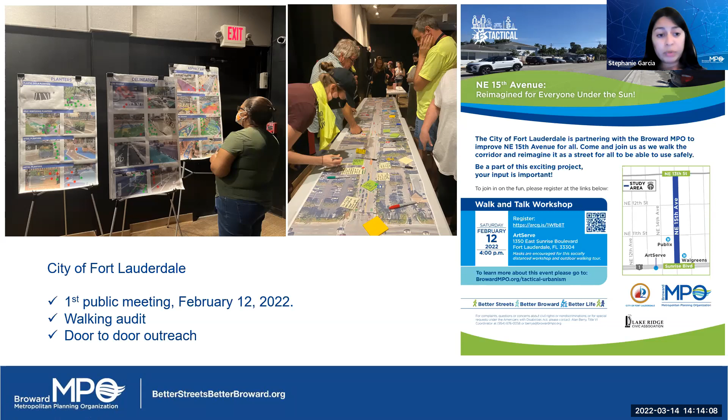At the ArtServe Gallery in the city of Fort Lauderdale. If we go to the next slide, there are also other opportunities, not only providing feedback but also volunteering. As we did in the city of Deerfield Beach, we have great volunteers from different organizations including AARP, and we'd like to extend this invitation again from the Tactical Urbanism Program, but this time in the city of Fort Lauderdale.

It's painting the streets, and we're also going to provide community service hours if you're interested, or if you have kids who would like to participate as well. This is a great opportunity to learn about what engineers and urban planners do in the field. So yes, this is an invitation for everyone. Thank you so much.

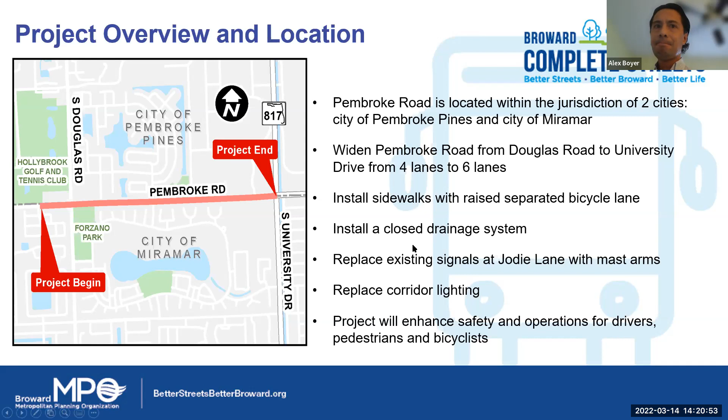Slide number 3. Let's get into the preferred typical section. This is alternative number 2. This typical section consists of a 22-foot wide median, 3 11-foot travel lanes with type F curb and gutter, a 3-foot wide utility strip or furnishing zone, and a 5-foot raised separated bicycle lane with a 6-foot concrete sidewalk adjacent to it. This is on both sides.

This typical section will require an 20-foot wide right-of-way acquisition to the north along the westbound direction, shown here on the left side, in order to meet the department's minimum design criteria. Next slide.

Slide number 4. Two other typical sections were also considered during the roadway typical section evaluation. So let me show you the other two typical sections. The first of these two alternative typical sections, alternative number 1, consists of a 22-foot wide median, 3 11-foot travel lanes, and a 7-foot on-street buffered bike lane, with 6-foot sidewalks on both sides. The right-of-way requirement for this alternative is 22 feet wide from the north side of the road. The major difference between this alternative and the preferred alternative is that the bike lanes are next to the travel lanes, and 2 more feet of extra right-of-way will be required. Next slide.

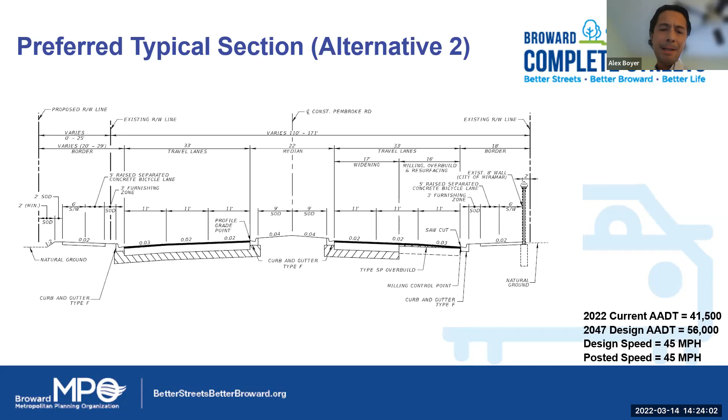Slides number 7 and 8 will show the project in plan view. The overall project length is about a mile long. North is up, and the road runs east-west.

The first segment of the project runs from Douglas Road to Jody Lane. The milling and resurfacing, shown in gray, starts west of Douglas Road, where existing bike lanes and sidewalks are present on both sides of the road and will be connecting to the proposed improvements. The pavement reconstruction, shown in black, starts east of Douglas Road.

The existing sidewalk runs throughout the project on both sides of Pembroke Road, but there is no existing bike lane in the westbound direction within this segment. The existing bike lane beyond Douglas Road going in the eastbound direction ends just east of Southwest 87th Way.

Another improvement in this area is related to access management. The area shown in green represents the proposed median. The existing full median opening at Southwest 87th Way will be changed to an eastbound directional median opening to increase traffic safety. At the Jody Lane intersection, as previously noted, the existing span wire signal will be replaced with mast arms.

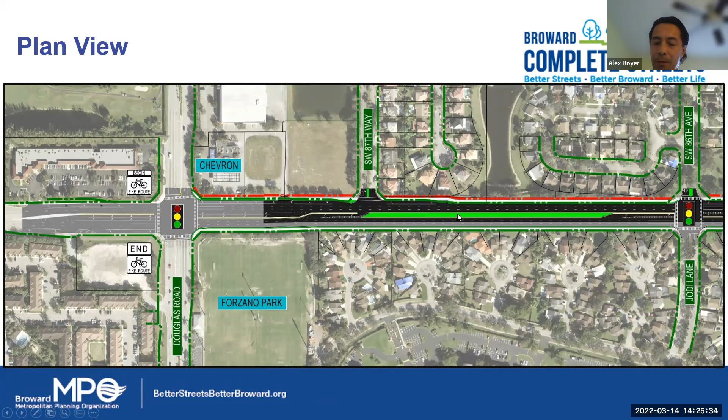Lastly, the line work in green is the existing right-of-way, and the line work in red is the proposed right-of-way to be acquired. Next slide, please.

Slide number 8. The second segment of the project runs from Jody Lane to University Drive. To remind you, the area in black is the pavement reconstruction, gray is the milling resurfacing, and green is the proposed median. The existing sidewalk runs on both sides and throughout the project as in the previous segment.

But the existing bike lane along the westbound direction ends just west of Poinciana Drive. The existing bike lane that ended just east of Southwest 87th Way along the eastbound direction, as shown in the previous segment, reappears just west of Poinciana Drive.

Existing sidewalks and bike lanes are present east of the University Drive intersection, which is the end of the project, providing connectivity to the Pembroke Road upgrades.

Access management improvements along this segment of Pembroke Road include modifications from full median openings to eastbound directional median openings at Poinciana Drive and at the abandoned parking lot where a future development will be constructed, as shown with the letters A and B on this slide.

The existing full median opening serving Walmart will also be improved by providing a longer westbound queue and by adjusting the median noses for safer in and out vehicle access.

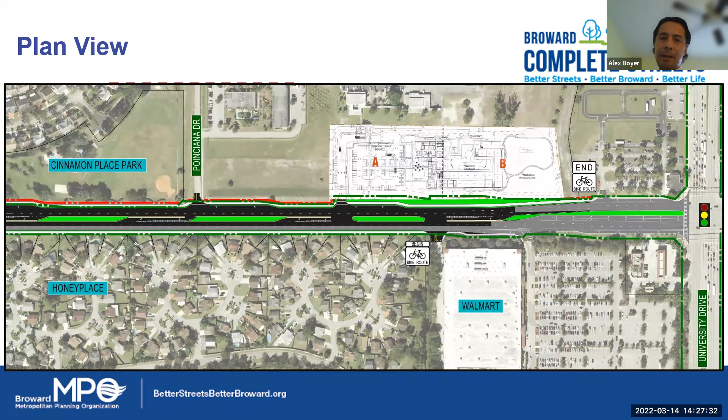Slide number 9, noise wall. No PD&E study was conducted for this project, so the FDOT will soon be conducting a noise wall study to evaluate cost, feasibility, and overall public benefit to construct a noise wall along the Honey Woods residential development between Southwest 87th Way and Jody Lane, to reduce the traffic noise that will be generated by the roadway widening and future traffic volumes.

The study will calculate future noise levels and compare them with existing noise levels to predict noise impacts. The goal is to achieve a noise reduction benefit of 5 decibels for 2 impacted receptors and 7 decibels for 1 impacted receptor.

To be clear, a receptor is a residential unit, and a decibel is a unit to measure sound levels. Urban noise wall heights range from 8 feet to 14 feet, and depending on how close these walls are located from the roadway or near the affected properties, they can effectively reduce noise levels.

An alternative location for the noise wall will be where the existing residential perimeter wall is, as shown by the blue line. The preferred wall location will be closer to the road, as shown by the orange line. Either wall location will affect the existing landscape, which will need to be coordinated with the local agencies for relocation.

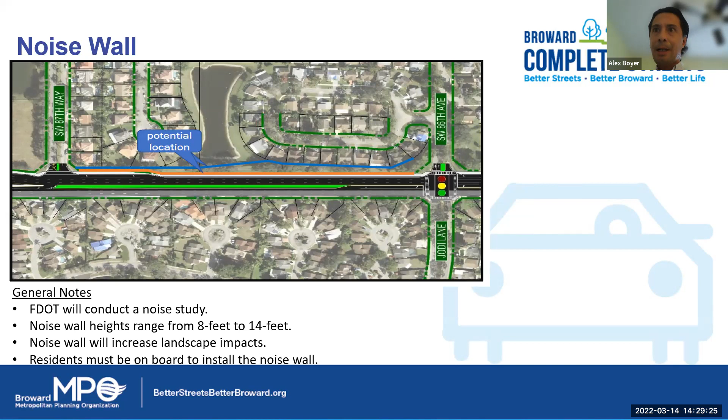Slide number 10, potential landscape impacts. This slide is just a visual representation of the existing trees that will remain adjacent to the pedestrian and bicycle facilities along the north side.

That being the case, not all existing trees will require relocation. There are many mature trees around this area that cannot be fully quantified until the design is further along and if the noise wall gets installed. Next slide, please.

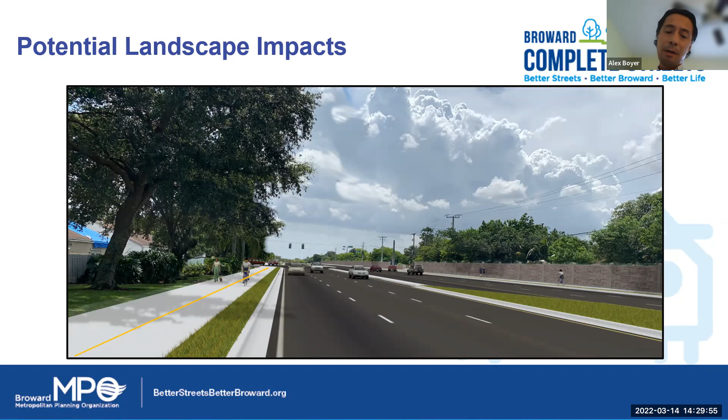Slide number 11, traffic analysis. Through our initial public outreach, there is a concern that vehicles traveling westbound along Pembroke Road will be backing up traffic in advance of the intersection at Douglas Road, since the project improvements will cause a merging condition just west of the intersection from 3 lanes back to 2 lanes, creating a so-called cut-through traffic situation through this residential neighborhood for vehicles trying to make it to Douglas Road and go north, as shown by the red dashed lines.

In order to address this concern, FDOT conducted a traffic analysis to evaluate congestion patterns and queue demands for the proposed intersection geometry. This analysis, along with proposed improvements to the existing intersection signal timings, found that during peak hours of operation, the queue in the through lanes will not block the right turn traffic from westbound Pembroke Road to northbound Douglas Road. Based on this evaluation, the cut-through traffic concern is not anticipated to develop. This topic will be presented and discussed in more detail with residents during our next public workshop.

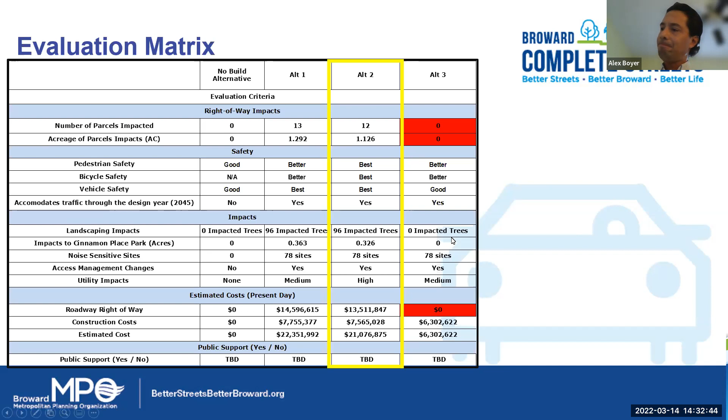Slide number 13, right-of-way impacts. The next 4 slides will go quickly, showing the expected right-of-way impacts for the project. We have identified at least 13 parcels that will require right-of-way acquisition based on the preferred typical section. The impacted areas are shown in pink shapes with yellow line work, representing the new right-of-way limits. These impacted properties range from existing businesses like the Citgo gas station.

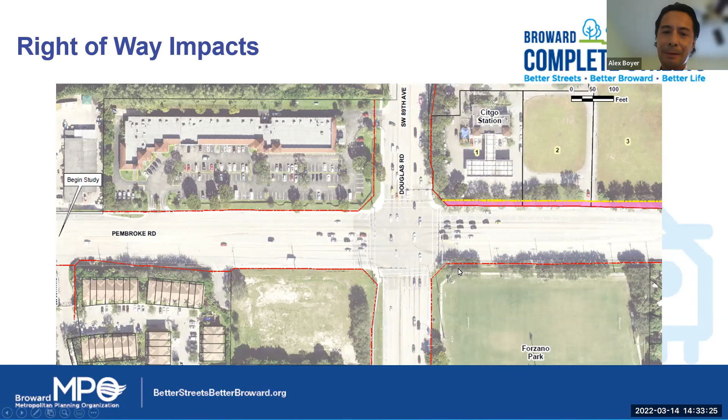Like these private properties owned by the Honey Woods Homeowners Association. And let me clarify that no residential property will be affected by the proposed right-of-way limits.

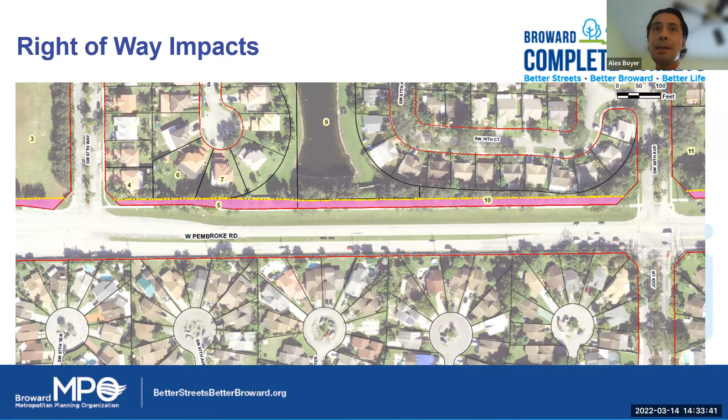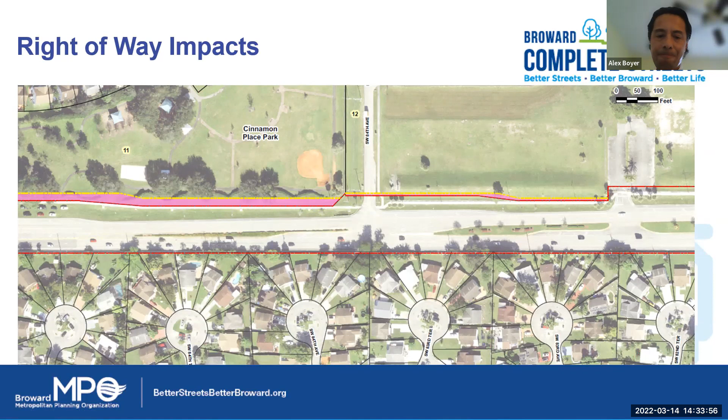Like public areas, like the Cinnamon Place Park owned by the City of Pembroke Pines. And let me say, no existing park activity will be impacted by the right-of-way acquisition.

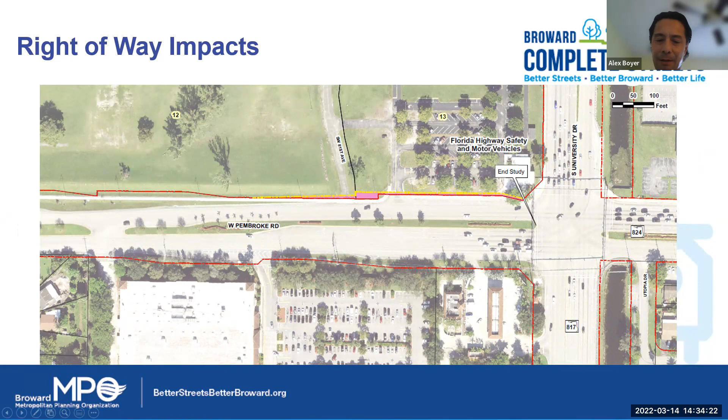Or like this little area owned by the Florida DMV. As of today, the design is 30% complete, and once the proposed plans reach approximately 60% completion, the right-of-way phase will kick in, including title searches, appraisals, acquisitions, etc., until we obtain final certification and the project is clear for construction.

Current project schedule and stakeholders. Our next public meeting is still to be determined. We have a production date for June 2025. There is no letting date since the construction is unfunded. The right-of-way is funded for fiscal year 2025, and the stakeholders are the City of Miramar, City of Pembroke Pines, Broward County, Broward MPO, and the Honey Woods Homeowners Association.

It's our last slide. We reached the end of the presentation. Here we have the FDOT contacts, Claudia Biniski Calvo, FDOT PM, and myself, Alex Boyer, FDOT PM assistant. Please feel free to call us or email us at any time. Finally, I want to thank you for this opportunity to present to you the Pembroke Road project.

Alex, thank you so much for your presentation. I'll turn it over to the CSAC members if they have any questions for Alex regarding anything he presented today. Alex, I don't think we have any questions.

So Ricardo, can I ask a question? Sure, absolutely, go ahead. Hey, this is Christine Banshee. Good to see you, and Alex, thanks for this project. I'm not a CSAC member, but I had a question looking at alternative 2 versus 3. It looked like 3 was half the cost and it saved all the trees. So I wanted to understand how 2 was weighted over 3, how the state decide between them.

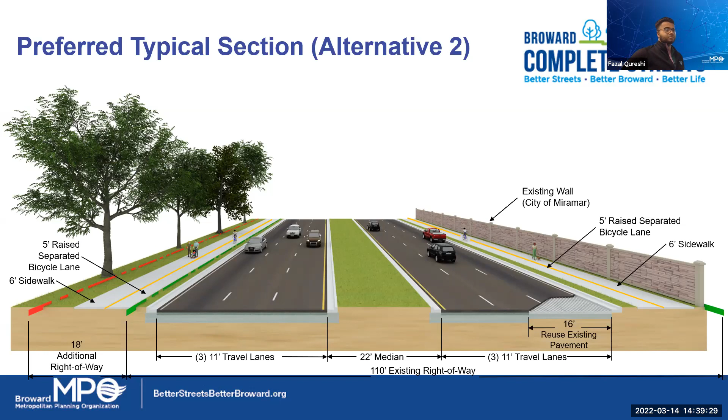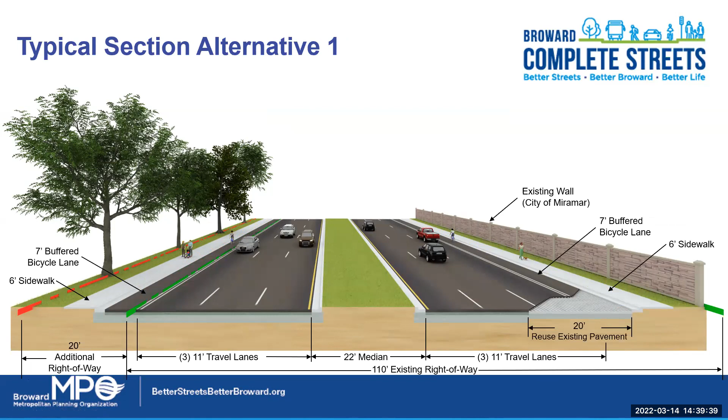Awesome, yeah, definitely. And at the MPO we love trees. We're tree huggers, so we definitely don't want to get rid of trees. Anything that we can do to save them, we will.

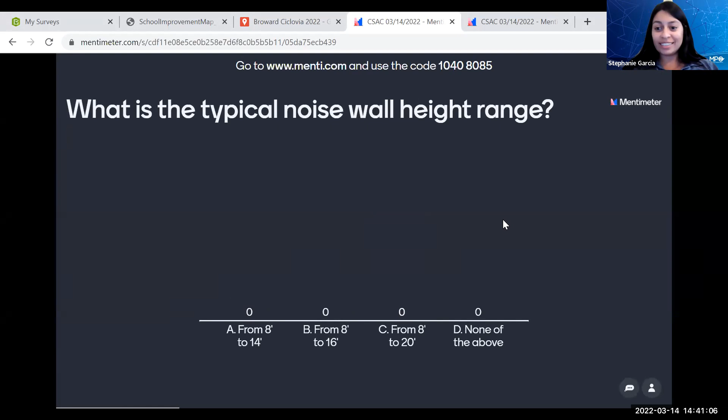Okay, then we have the next question, and hopefully everyone was paying attention. What is a typical noise wall height range? I remember this answer, but I want to know—I took note of the answer, so let's see what everyone else thinks.

Okay, so we have 14 responses, and everyone is saying from 8 to 16. What do you think, Alex? What was the right answer? Oh, that's very disappointing. It is A—it is from 8 to 14 feet. Oh, so brownie points to those three people that guessed it correctly. So close, I was off by 2 feet.

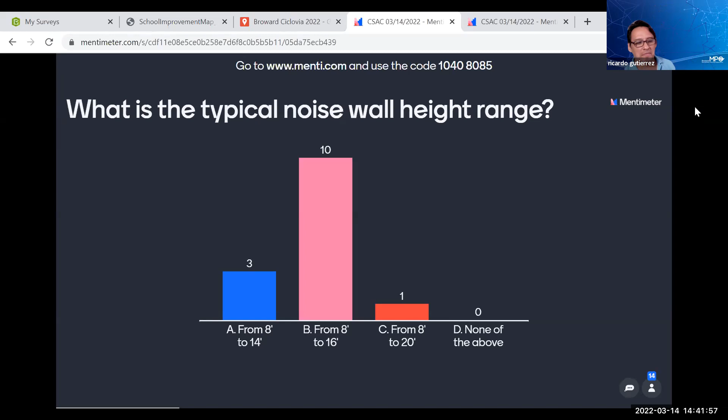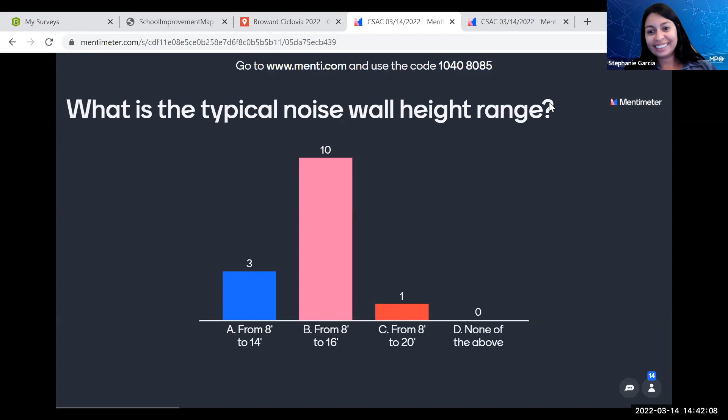Okay, can you guys see my screen now? I always have a difficult time doing this. Can you guys see my screen?

Now we can. Perfect, thank you. Our next presentation is for my construction folks at FDOT to talk about some of the multimodal improvements along Lyons Road. This is one of our initial mobility projects that we've been working on since the beginning of this program. I'll turn it over to our construction folks at FDOT to give us a presentation.

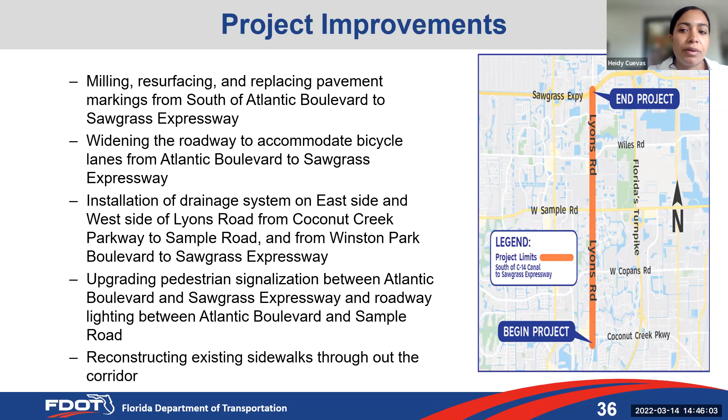Now Jonathan Guzman will be talking about our project coordination efforts. Thank you, Heidy. During the Lyons Road project, there were a few tasks that required extra coordination effort. One was a 24-inch force main that the City of Coconut Creek was scheduled to install via directional bore within the corridor. Coconut Creek's force main project could have possibly extended the contract time and potentially affected the proposed FDOT project improvements.

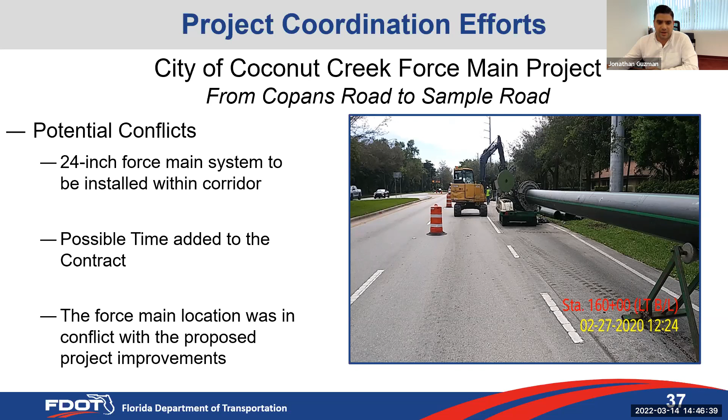Next slide. The team overcame these possible conflicts by coordinating with the city of Coconut Creek on where the force main was going to be installed, then making necessary adjustments to avoid any conflicts with FDOT's proposed plans. Additionally, coordination was required with the FDOT contractor to identify other locations where work could be performed without impacting their original schedule. Lastly, coordination between FDOT, the City of Coconut Creek, and the FDOT contractor was crucial in ensuring that all FDOT proposed work and the city's installed force main would not conflict with each other.

Thanks to the open and great communication between all parties, we were able to work together and cause no delays to either the city or FDOT contractors. Next slide.

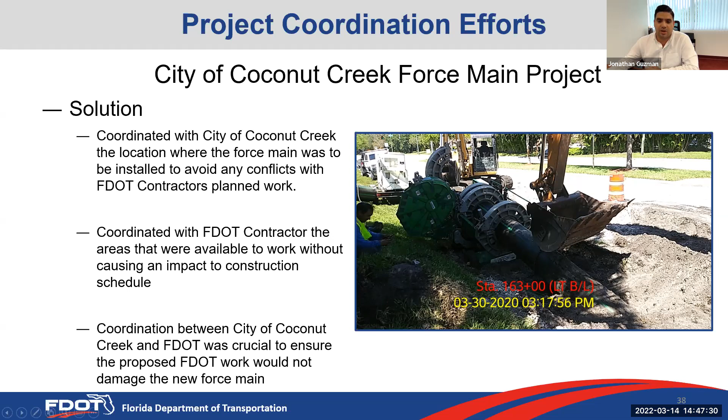Another task that required additional coordination effort was the drainage repair project from Broward County, which would occupy about 2,000 linear feet of the Lyons Road corridor. This repair would not allow the FDOT contractor to perform proposed work in this area and could have possibly affected the construction schedule. Next slide.

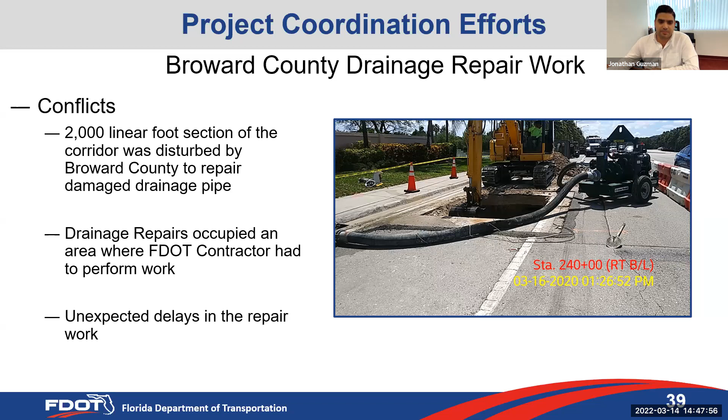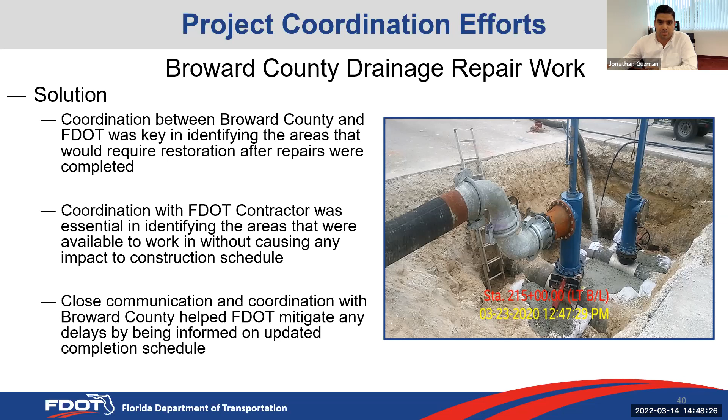The team overcame these possible conflicts by coordinating with Broward County on the area they would occupy to perform this repair work, and by coordinating with the FDOT contractor to identify areas we could avoid impacts to the construction schedule by mitigating work in those locations. Thanks to the great communication between the FDOT contractor, FDOT, and Broward County, we were once again able to work together and avoid any impacts to either the drainage repair project or the FDOT proposed work. Next slide.

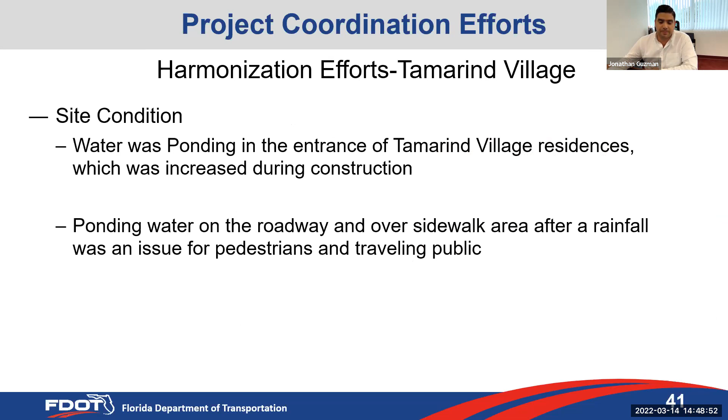The team overcame this by surveying the area and, with the help of the FDOT engineer of record, coming up with an asphalt harmonization plan to aid the ponding issue. Special attention was paid to pedestrian access in the area. After paving the entrance, a large improvement was noticed regarding the ponding issues. Thanks to the coordination between Tamarind Village, FDOT contractors, and the FDOT engineer of record, we were able to come up with a plan and execute it, benefiting the community that was at stake.

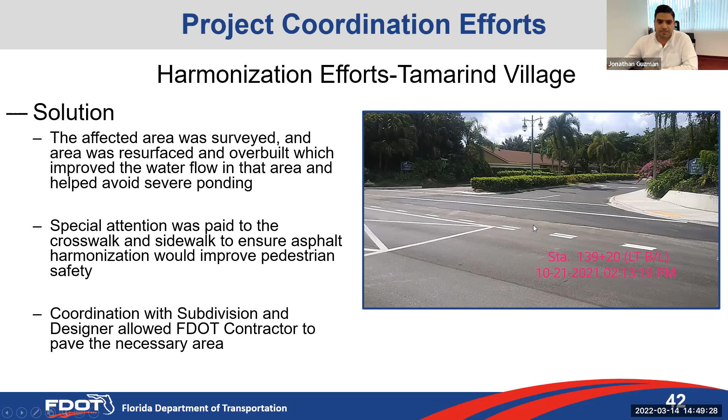Next, we have Felipe Gonzalez, serving as senior project engineer, to further speak on Lyons Road final conditions and improvements. Thank you, Jonathan. After extensive coordination for two years with local stakeholders, municipalities, the contractor, and FDOT, our project is coming closer to completion.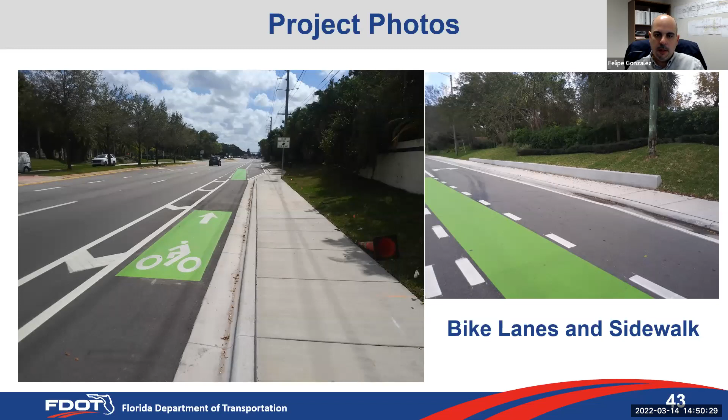The picture on the right shows an area where we installed a gravity wall as part of the scope of the project, which also includes new sidewalk, new curb and gutter, new green bike lane markings, and turning lane pavement markings.

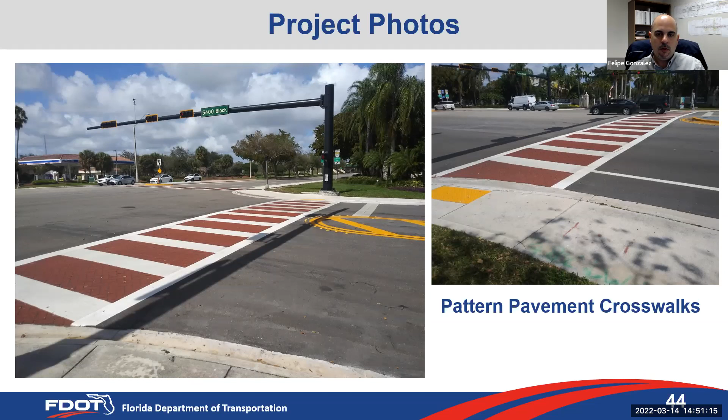The City of Coconut Creek and FDOT entered into a joint participation agreement for the installation of decorative pattern pavement at multiple intersections throughout the corridor. The funding was provided by the City of Coconut Creek. These two pictures show the newly installed pattern pavement at the intersection of 5400 Block and Lyons Road. The project contractor also installed pattern pavement at an additional 7 intersections throughout the corridor at Winston Park Boulevard, Wells Road, Northwest 34th Street, Hammock Boulevard, Lyons Plaza, Coconut Creek Parkway, and Northwest 6 Manor intersections.

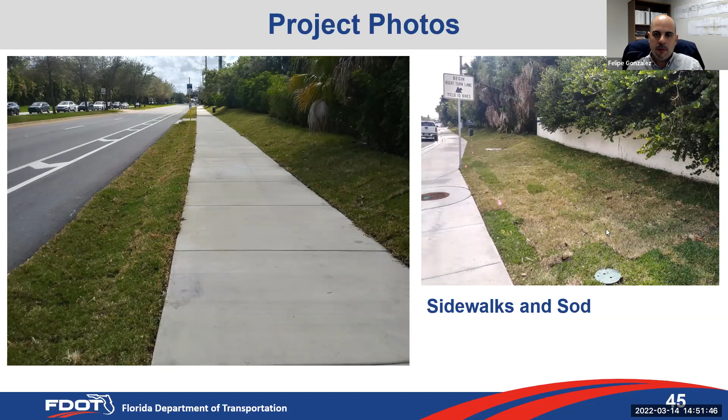Additional scope of work for the project also included harmonization. You can see this in these two pictures with new sod between the new bike lanes and the sidewalk, and also in the location between the new sidewalk and the existing right of way. The scope of the project also included repairs for the existing irrigation and installation of some irrigation components within the project limits.

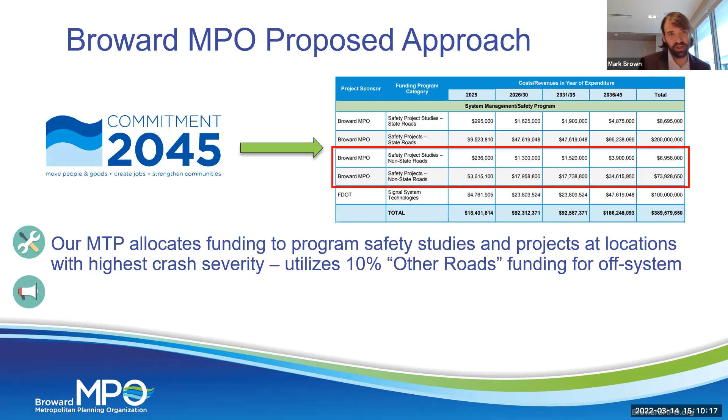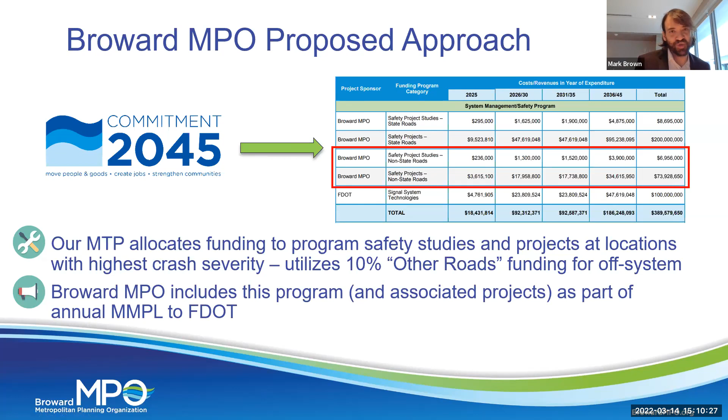We include this program as part of our multimodal priority list, the MMPL, which is how we're going to implement our new safety process. Many of you are already familiar with the MMPL—it's the way we annually identify projects for funding.

Before projects go into the MMPL, we want to make sure they're program-ready and that we know what we're going to build. We want projects to have a defined, detailed scope of work, an accurate cost estimate, and proof of community engagement and political support. This is the primary way we'll be delivering safety projects.

As many of you know, FDOT already has their own RSA process for state roadways. What we did at the MPO was model our process on what FDOT is already doing for theirs, as a way to identify and mitigate safety problems at the Broward MPO.

All right, I'll give you an overview of the framework we put together over the past year. Next slide.

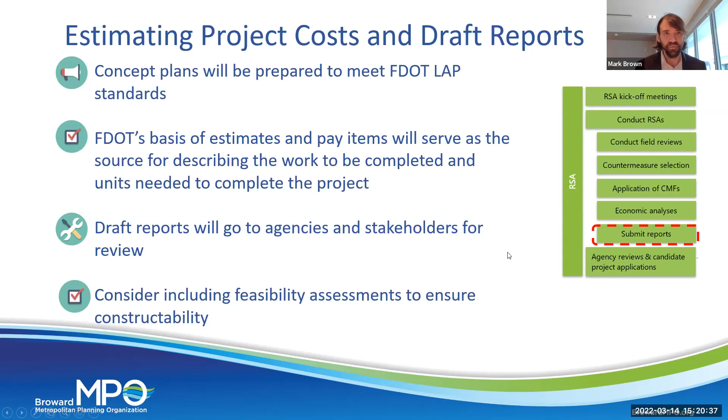Then we come to our prioritization phase, where the MPO prioritizes projects with help from the Intergovernmental Review Panel. Going back to the MMPL, we want to make sure that any project we recommend meets MMPL programming criteria, that it has a positive benefit cost ratio, and that the project is worthwhile from a financial perspective as well.

Agency coordination is very important through every step of the process. We'll be coordinating with the county and FDOT going on through implementation, and all of the stakeholders will be involved from beginning to end.